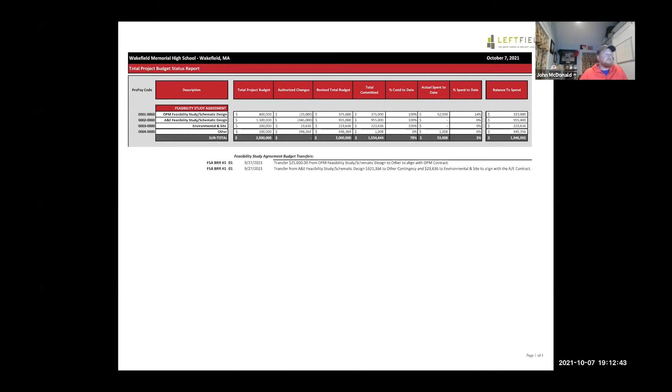Our feasibility budget. So MSBA has standard cost codes and cost categories. In the feasibility, there's just 4 of them. So this is sort of a standard budget template for MSBA. You got the OPM feasibility schematic design, the architect and engineers feasibility schematic design, environmental and site, which is a lot of the architect and their consultants' work. And then you've got another category, which is really just like a contingency for miscellaneous items. So the original budget was $2 million. It was approved by the town some time ago, I think maybe this time last year.

That we're working to, that's been submitted and approved by MSBA. It's in their ProPay system. ProPay is the system that MSBA uses to process invoices and reimburse school districts. So we're working with MSBA on that.

Last month, if you recall, we had a budget revision request. Anytime we change any of these approved amounts in the line items, we have to submit a budget revision request. We did that last month based on the actual OPM and designer contracts that have been processed and submitted to MSBA. So our revised total budget is in this column. We're still tracking that $2 million, but our other category is significantly more than what we started with. So that could be used for unforeseens or miscellaneous stuff as we move forward.

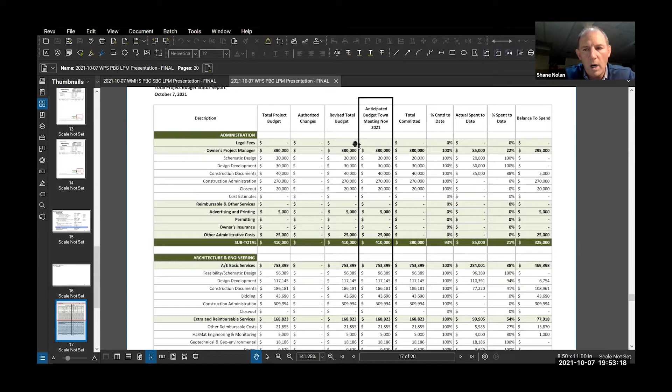I've added a column in here just to show what we anticipate the revised budget is going to be, and what we think we'll be going to town meeting with on November 6th. What I've done is I've plugged in Bond's last estimate number, which was 9.165, including a pre-construction fee. So that's what bumped it up. We talked a little bit about the overages and the reasons for that at previous meetings, but I've plugged that in. And then down under the construction contingency, we were carrying a 9% construction contingency originally.

I don't recommend that we continue to carry that dollar amount. I think it would be appropriate to prorate the 9% with the current construction estimate. So we increased that dollar amount for the construction contingency to about 840,000. Given what we've seen and what we know after walking the building numerous times, had design meetings, working group meetings, I think a 9% construction contingency is absolutely necessary for this project. So that will bump our overall project budget up to about 12.15 million.

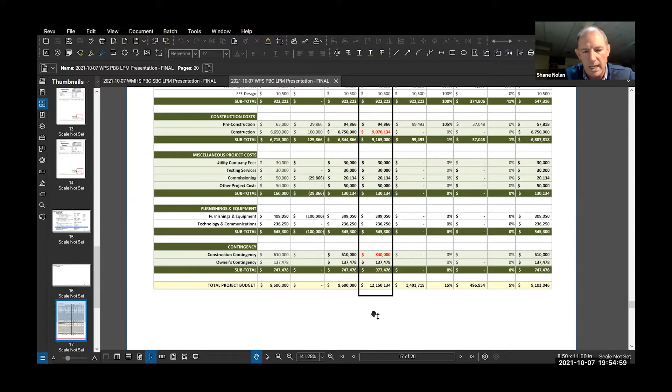That's what we expect. The number will be somewhere in and around that when we go to town meeting. We'll have the hard bids on November 4th. So hopefully that construction number will come down a little bit. But just wanted to sort of let people know what the overall number is right now, based on the latest cost estimates, that we're up around 12.15 million overall cost, which is about 2.5 million more that we'll be requesting at a town meeting.

What's the game plan to get ready for town meeting? Like, who's going to be presenting? What are we presenting? Do we have support from town council, school committee that are going to stand up? I feel we're going to be getting these numbers last minute, which we know, but are we prepared for the town meeting to ask for $2.5 million? What do you mean, are we prepared? We're going to be asking for it. We've talked to Steve. But how is it going to be presented, I guess? This message has to... I was hoping you'd do it, but I guess I have to. Well,

yeah, I mean, I requested information from Bond, and Lynn gave me some more information on how those costs have increased due to the pandemic. You know, where we were pre-pandemic and where we are as a result of the pandemic, and the costs that have gone up, some of them going up 30%. I have a whole page full of information regarding the costs that have escalated. And

Steve is going to indicate that essentially, because we're bonding this over a period of time, the extra 2.5 million is not a lot of money. I think he was saying like 75,000, 80,000, something like that a year. So we talked to Steve, we worked it all out. We haven't presented it obviously to town council or to the FinCom yet, because FinCom hasn't met. And when the FinCom meets, I'm going to give them essentially the 2.5 increase and hopefully indicate that it's going to be less than that once we get the bids in, but we won't get our bids in until the 3rd.

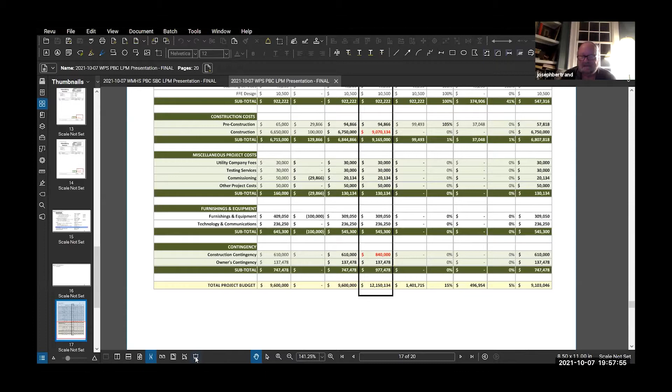Any other questions regarding this and a potential town meeting request? Good job to Janet and HKT for pushing that bid package up. I don't know how comfortable you feel with it, but I like it. It's good news. It's going to printer. We're nervous, but working hard to get it. We'll have an addenda. I've talked to Shane about a series of addenda, probably 2. All the consultants have been panicked this week, as they normally do, especially with the loss of 2 weeks. They're all scrambling. So we're hoping that we have a good package.

I think the architectural is in very good shape, but it's the coordination that is the thing that we worry about at this point in time, but we're working hard on it. We'll have the opportunity to reissue drawings as we find things, or Word documents or spec sections as we go. We're trying to pick up as much of it as we can this week. That's why I've been papering Shane to death with details of the front end, and we'll be doing our best. Thank you.

So next thing tonight: any other questions regarding the budget and the town meeting? Okay.

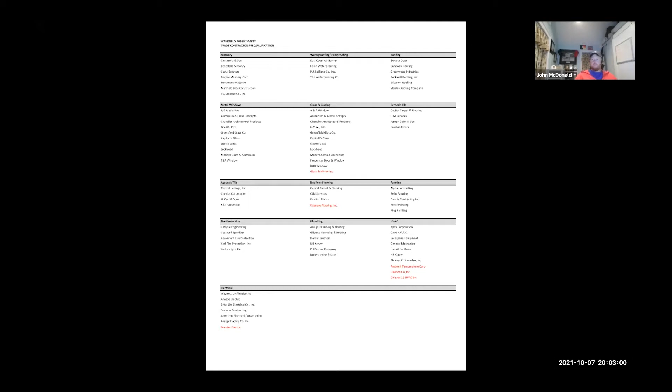Hearing none. Chip? Yes. John? Yes. Bill? Yes. Mark? Yes. Tim? Yes. Jason? Yes. Tom? Yes. And Janine? Yes. And I'd like to thank specifically Chip and Tom for handling this on behalf of the committee. Appreciate that, guys.

All right. And then just have a slide, I'll hand over to Dave to talk a little bit about the GMP, what that will include. We'll certainly have a draft for November 4th, and then we'll look for some sort of approval, whether it's the full GMP or an interim GMP sometime after town meeting. But I'll hand it over to Dave to talk about that.

So those of you that were involved with us at Galvin will sort of remember how our GMP is structured, but for those that don't remember or weren't involved, we can go through a real quick summary on what goes into the GMP. Obviously, the GMP is a contract amendment that switches our contract status from pre-construction and authorizes us to proceed with the construction. So the major thing that the GMP allows us to do is to start requesting approval for authorization to sign up subcontractors.

Obviously, we just went through the pre-qualification of filed subs. They'll all be hard bids in hand at that point, so that's really easy to establish those trades. And then for all the non-filed sub trades, we have them on the same bid schedule. But as you can probably imagine, with the way things are right now, 3 weeks is tight.

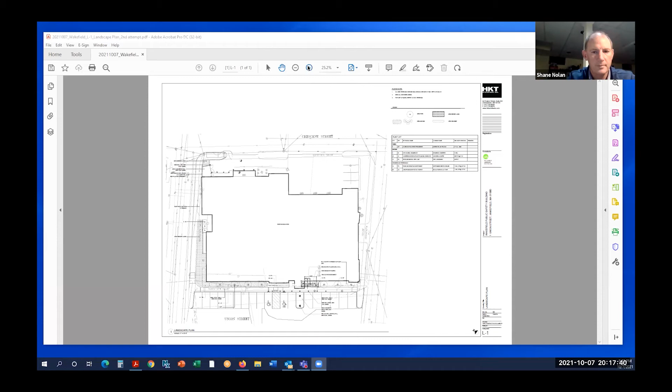I went over this a little bit with Shane last week when I was with the chief, and he saw it as well. So I just wanted to go over what we're left with when we add these additions on. There's an addition here, there's an addition here, and there's an addition in back there. So I wanted to go over the parking. There are currently 18 parking spaces, and at the end we are going to have 18 parking spaces. They've shifted, of course, as the entry has shifted. You have this extension that comes out now, and we have an extension.

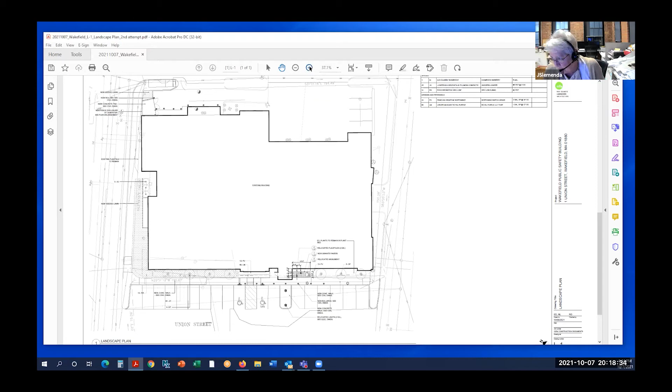It's a little bit smaller because the parking spaces are per code, and the van and the regular parking spaces are per code now. I don't know if they were before, it's not relevant. And then I'm going to blow this up a little bit more so you can see the actual entry. So you're going in here.

We are moving the flag poles, which we always had in the drawings, over to just to the right of the new glass box entry. We use those elements to give some elevation to that element to make it a little bit more pronounced. Our landscape architect pointed out to us that we had the flag poles too close to the building and the flag would whap against the building. So we shifted them a little bit so that isn't too annoying to anyone.

And then we've moved the monument over to that side as well. So that's what will happen outside the building. And then the other couple things, and maybe Dave can comment on this, the light poles. There's 4 of them in front of the building with the big light poles. They're not shown on this, somehow they got missed from this drawing, but there's these 2 here.

This one right here is actually sitting right in front of the building, so we're going to have to shift that. And the other 2, we plan on leaving where they are. They'll have to be, I believe, removed during construction because you just won't have the room to do the construction. Dave, is that a good comment about that? Absolutely. Yeah, they'll be removed and then reinstalled.

Reinstalled. And the question is whether that foundation, what's below grade, will come out as well, or whether we'll be able to salvage around that. We should probably talk about that because we need to do that. And we're going to be replacing all the sidewalk along here as well. So the question is, do we need to shift this one because it's sitting right by the building? And do we shift the second one so we get an even light pattern on the paving? So that is the question.

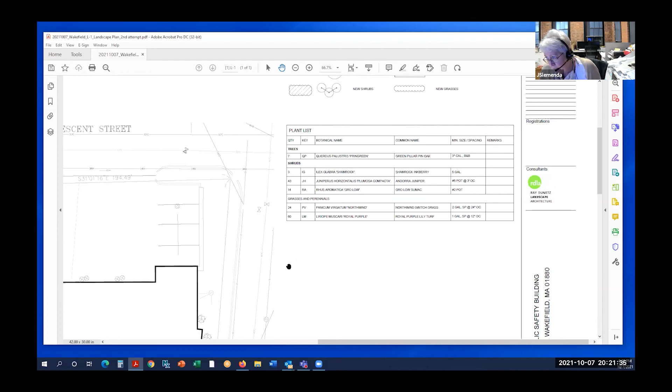And I don't have the name of those trees right in front of me, the listing of them. I can tell you from the schedule that they're green pillar pin oaks. And there are 7 of them planned for the site, and those are right in front of the building. If I can move the drawing, it would be nice. So those are the 7 trees, and we've moved them back closer to the building rather than out into the sidewalk.

So Shane asked me to show one other quick thing: we are relocating the lights. You have 2 lights now with a slightly smaller width of that element that comes out on the site. We sort of put them behind each other. I don't even know if they're needed, but if you've all walked into that building a million times, there are 2 light poles in the front and the flag poles are behind them. And so we're really changing the whole image of that.

And so their question to me is, do I even want to relocate them at all? I don't know how much they offer as far as light. They're not down lights, they're little posted globes. So we can talk about whether it is something you want to do or just leave one of them even. They sort of line up with the front of the building now. So that's what it looks like. The back of the building has the dumpster location, and this is the final layout of that.

A bunch of bollards now. As you know, we're more protective of public safety buildings now with bollards than we used to be because of 9/11. So we tend to have bollards in front of anything that's approachable by a vehicle. So there's a bunch of bollards. Does anybody have any questions about that?

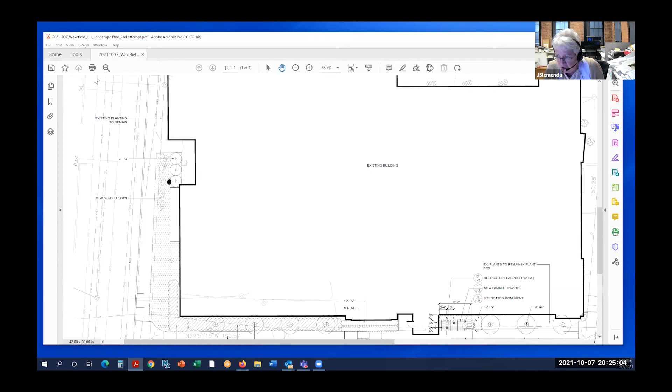Which one, these? On the left side. Crescent Street entrance. These 4 here? No, up. Up here. Oh, those are shrubs. Those are just shrubs. Yeah. And there's nothing up there. At the end, I think there's a little bit of lawn right there. And this is all paving, as it is now. Could that lawn be the electric car space? Well, there's a parking space in front of this.

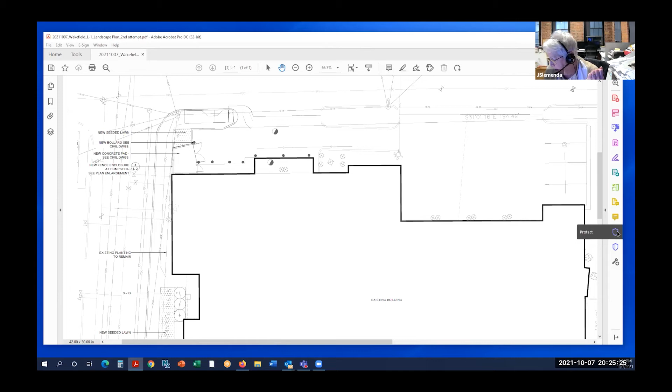I know it's a tight lot for landscaping. I can't draw it without... that's not a good way of describing it, but there is a parking space right there. With the addition, we had to push it back. This was the scheme that people approved, so to speak. So there are very few opportunities for anything here. And we can talk about it more. Should we leave them in for the bid right now? Yes. We'll establish a landscape bid price, but we won't pull the trigger on landscape for a long time. Okay. I think that's a good idea.

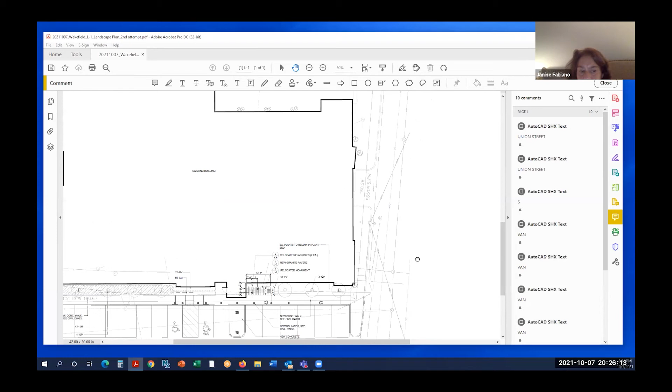What kind of trees did you say you currently had designed? They did the green pillar pin oak. Pin oaks. Because for the sidewalk trees, they often use a narrower tree. Something like that might work better. Which one? I'm not sure what kind it is. I had to find out. I call them little columnar, little leaf lindens. Yeah, very slender. This is what she came up with, but I'll ask her again if she has any other ideas because of the height and the canopy eventually. Okay. So that was that.

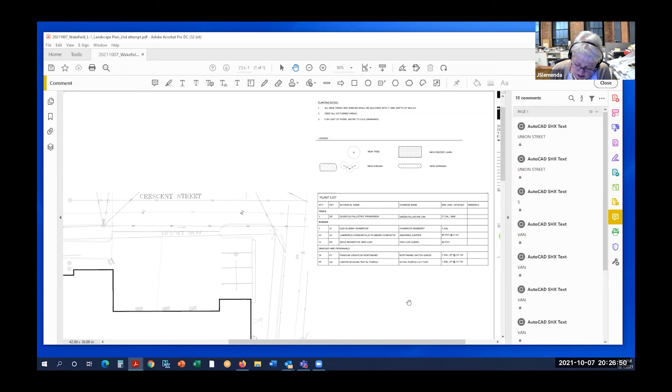So just the bollards also, John, I don't know if the police department has seen those, if they're okay with those. I know they protect the building, but I reversed my car into a tree in front of that building before. We've been putting them in; if our grade is raised, we don't have to do them as much, but this is right on grade. You could plow right into the front of the building if you wanted. I don't think it's a bad idea. Can I comment on the bollards? When we get to it later on, is this something we ask Joe to have Dennis be involved in, thinking about this?

Well, yeah, I mean, I think Joe won't want them, right? Because they get in the way of his snow blowers or whatever he uses to clear the sidewalks. That's why I want to ask the police first.

Yeah, Chief Scory? So my comment on the bollards is I like them because the areas that they protect are mostly glass. So when you're looking where the two handicap spaces are, that is the old entrance to the building. That's going to be all glass to the records office there. There is masonry, but there's a lot of glass there. And then we have the new entrance, and to the right of the new entrance is glass for the fire department administrative offices.

So I agree with the bollards. I think it's a great idea, especially out back. I just wanted to comment also on the trees out front. I like trees, big fan of trees, but we have a very limited amount of space there between the sidewalk and the building. And so if we plant trees there, they'll be growing against the building. We'll have branches hitting windows, blocking the views of windows.

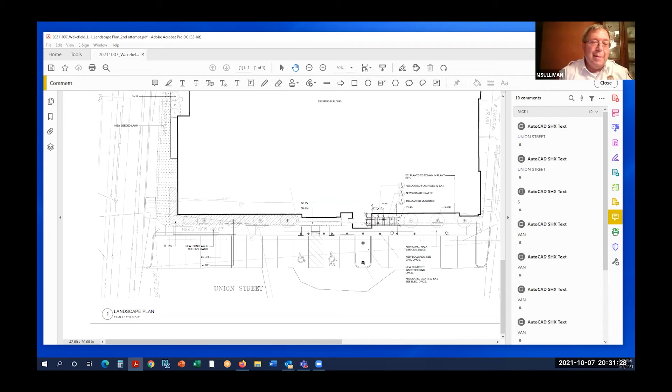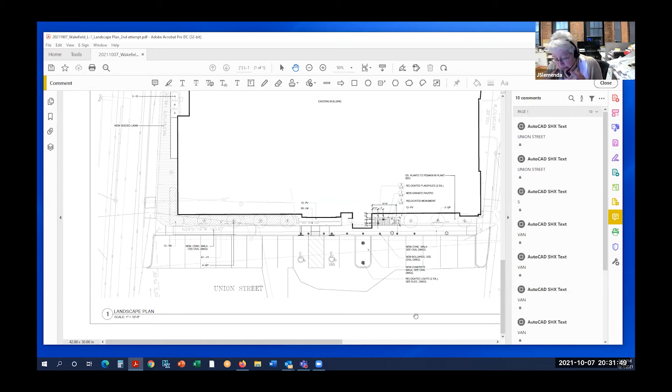All right, so I'll go back to the landscape architect. I asked her specifically to put something on because we didn't want to neuter the place by taking all the trees out without acknowledging that we could shift the locations and try to find something narrow. We'll get back to you on that one as we go. We'll own these for right now, and it should be okay. So that's the plan. Any other questions before I get rid of that? It's a tight site. So, okay, that's that. Anything else, Shane?

No, I forgot to follow up with you today, John. I spoke to Chip yesterday about the zoning. Did you hear anything back from them? Do we have a date? About the what? The zoning? No, we haven't heard anything. And I completely forgot about it. We've been so consumed with other things that got submitted. Chip, do you have any comments?

Well, so, yeah, I would have loved to have seen the package before it went in. But I told you months ago that we had Brian McGrail, a local lawyer that does all our public buildings pro bono. So I just want something sent to him, but we don't have to worry about that for the next 2 or 3 days.

Okay, okay. I mean, it sounds like it's going to be a pretty easy non-conform. It's already a non-conforming building. It's probably going to be a continuation of a non-conformity that is not more detrimental to the neighborhood. So it should be pretty simple. But I would have him present it. Okay.

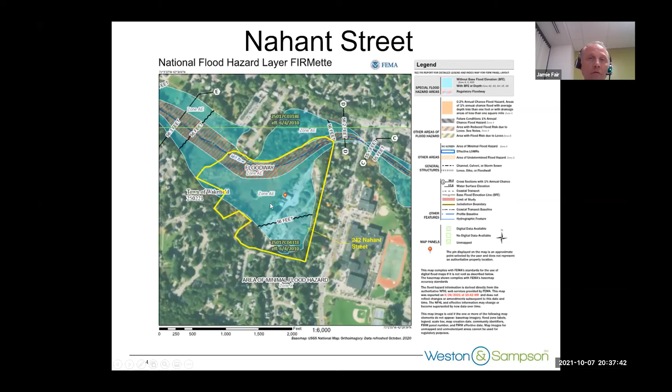You can see pretty much the whole site here is in that FEMA flood zone. So we had some concerns related to that. And we just summarized our initial findings on this. But as I mentioned, we're in the FEMA flood zone. We are adjacent to wetlands and the river. We also have residents abutting the property on one side, on the east side of the property. If we were to continue looking at this, we certainly would need to do a flood study to take a closer look at the flood zone issues.

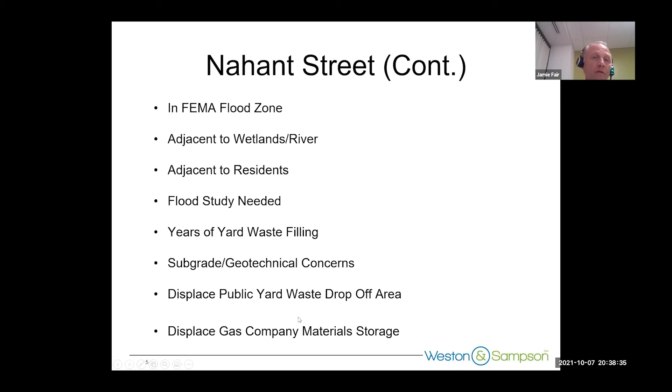We understand that there's been yard waste filling going on there for years now. And so there's definitely some concerns related to subgrade and the geotechnical concerns with foundation construction due to the filling activities. It is an active public yard waste drop off, so that'd be a function that would need to be displaced. And then we also understand that the gas company has a material storage facility there. So some of the challenges that we saw coming out of the gates with the Nahant Street site.

From our last meeting, we had mentioned before, we looked at these other sites, worked with Joe on these. We looked at the Vinton Street ball fields and the Nacella playground. And both of these are active ball fields, and turns out they're also in a flood zone as well. So we didn't consider those further for review.

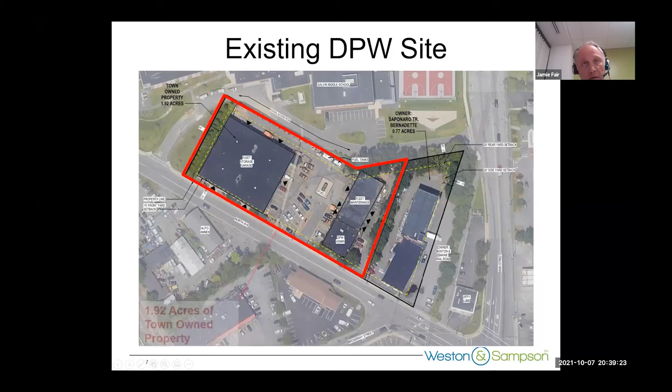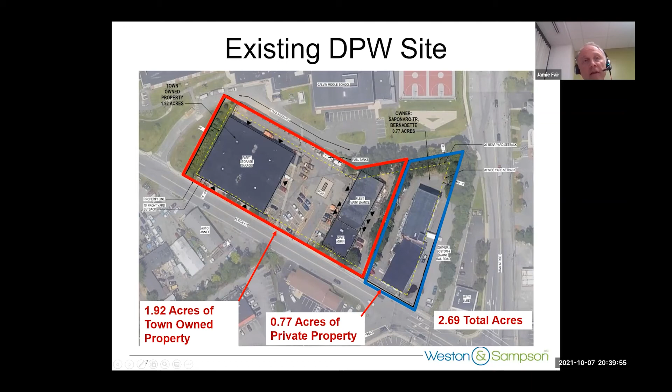So with that site analysis, that really brings us back to the existing DPW site. You can see the aerial here located right off North Avenue at the corner of Main Street. And at this site, we have a town-owned parcel of about 1.92 acres. This is all owned by the town, as I'm sure you know. And then we also looked at incorporating this adjacent parcel that's currently privately owned, because this site is small and we have this immediate adjacent parcel. That's another 0.77 acres. So with that parcel, we get up to just about 2.7 acres to work with. And so that's what we looked at for our various test fits and layouts, and I'll walk through those now.

So Jamie, let me just ask the question. Sure. I mean, you're talking about a building. Are you talking about eminent domain? Are you talking about buying that? What are we talking about if you're planning on using that 0.77 acres of the Kiltron building? Right. So I guess maybe Joe, I might ask you to chime in here. We just had some preliminary discussions. I'm not sure of the exact mechanism of how that would be attained, but I know that's something that we wanted to take a look at there.

So Chip, to answer that, it's something that potentially could start as a conversation. I think that if we weren't to think about that, it would take the constraints of the site that exists now and make it infinitely harder for Weston and Sampson to try to figure out a way to make our existing footprint work. That being said, absolutely nothing is written in stone. So if that is probably an option that the committee or the town would not want to think about, or at least try to have a conversation about, then we'd have to readjust and plan for it. But I think that the challenge with where we are and how we're laid out is circulation, vehicle traffic and getting in and out to do business.

And the more that Weston and Sampson went back to looking at, Jamie's group probably went through, honestly, between 14 and 16 different layouts to try to figure out how to get all the puzzle pieces to fit. How do we get 70% of the puzzle pieces to fit? And the keystone to that whole piece and keeping our operation there and making sure that we could operate safely and efficiently, that adjacent parcel is probably going to have to be something that we're going to have to think about our options there, and whether or not we want to have the conversation to see whether that is actually palatable and attainable.

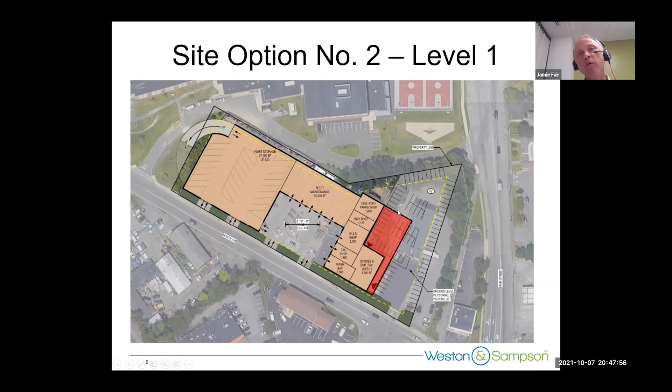Right, right. So we'll keep moving forward here and we'll get into some of those details a little bit later. But this red area here, this is an area where the offices and employee facilities would extend out over the parking to get the square footage needed for the program and co-locate that with the parking. And so this second level here would be offices and employee facilities, level 2.

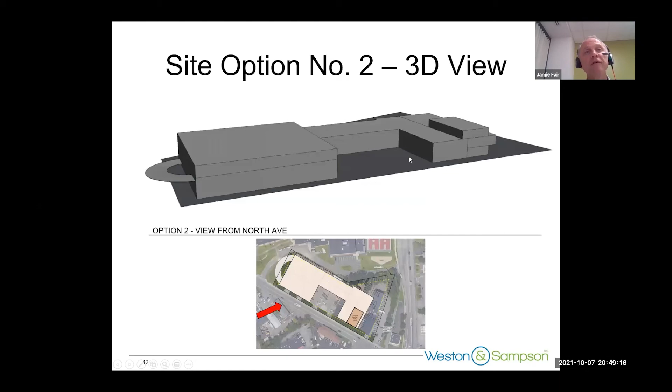And this is another massing diagram looking from North Avenue, where you can see the 2-level vehicle storage here on the left with the ramp going up, vehicle maintenance in that open courtyard that we talked about here. And then again, the 3-story admin and employee facilities.

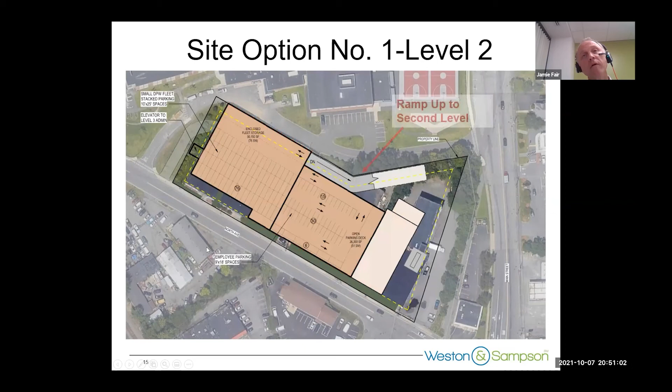And then we'd have this ramp that would run up to the 2nd level along the back side of the property. And then this red area, this would all be a 2nd level here. And I'll walk through this a little bit more. So that's the ramp that gets us up there. And then this tan here is that 2nd level, where this would be an open deck. It'd be a canopy, but an open deck for employee parking, to get it up over that courtyard to fit all of the employee parking that we would need for the full program.

And then on this left side, this would be an enclosed second level, minimally heated, for the balance of the DPW trucks and equipment. This is all stack parking. We recognize this is not preferred from an operational standpoint, but just as a test fit, what does it look like if we got it all here? This is a way to make it work, and it could be improved if we want to go in this direction, but we'll start here.

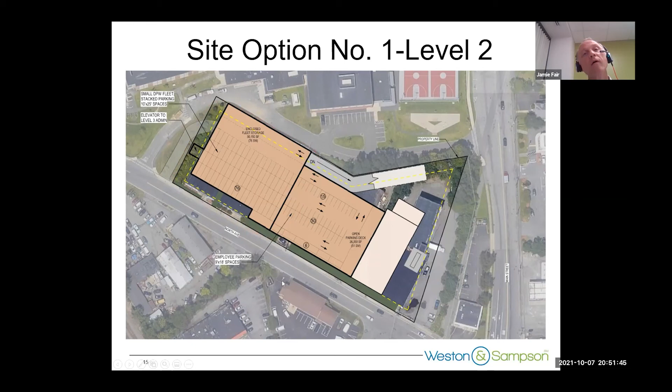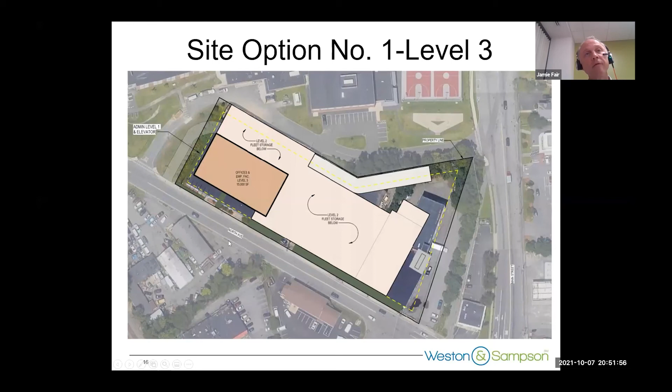And then we have level 3 over on this side with the employee facilities and offices on that third level there. And so another massing diagram from Main Street: we have the ramp that comes up the back here. And then this is that deck that spans over the open courtyard for employee parking. And then we have the 3-level structure on the right, vehicle storage and admin. And then we have vehicle maintenance over here on the left.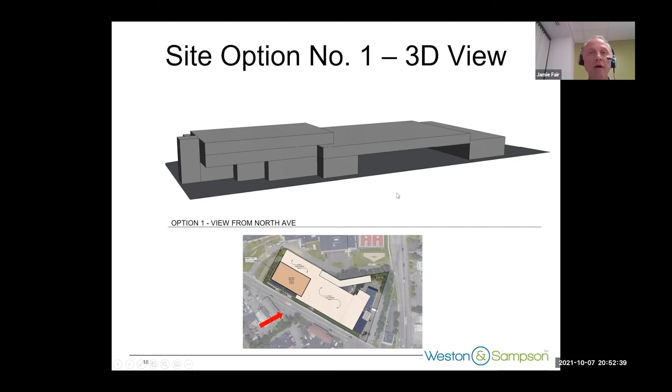So definitely outside the box, we recognize that. It's actually a smaller structure and it fits more, but that's because we have that significant stacked parking arrangement. And that structure, we're separating out the parking deck, which is another about 26,000 square feet, because that's really more of a site feature. It's not like heated enclosed space. So this would fit the entire program.

And we'll talk about costs in a moment, but I just want to go through some of the other options that we looked at just to give you a sense of some other possibilities, but we didn't really fully carry forward due to some shortcomings. So this option 3, this is level 1. With this courtyard, really we feel is too tight at 65 feet with facing overhead doors here. Not good from a truck circulation standpoint. Fleet maintenance would be undersized from what is really required at this point, and the wash bay would be exiting into the vehicle storage garage.

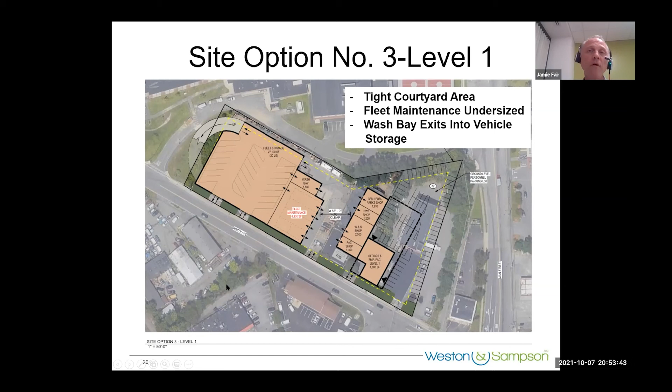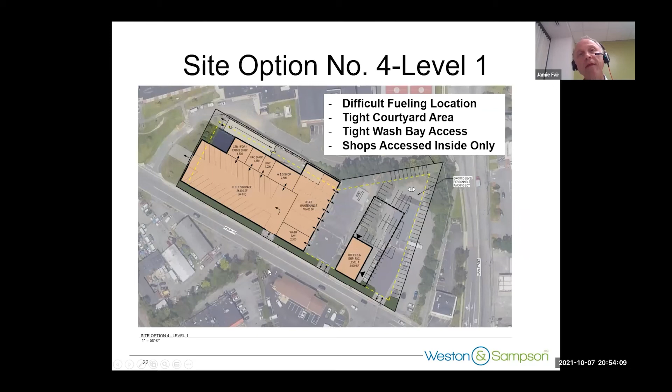So we looked at this layout, didn't really like it, but just wanted to share it with you so you kind of understand the process we went through. And this would be a 2-level structure. Option 4, similar thing. Didn't really love it from a functionality standpoint, but we did look at this type of configuration, and the fueling was really in a difficult spot and a lot of other operational concerns. So we didn't carry that forward either. And this would also be a 2-level structure.

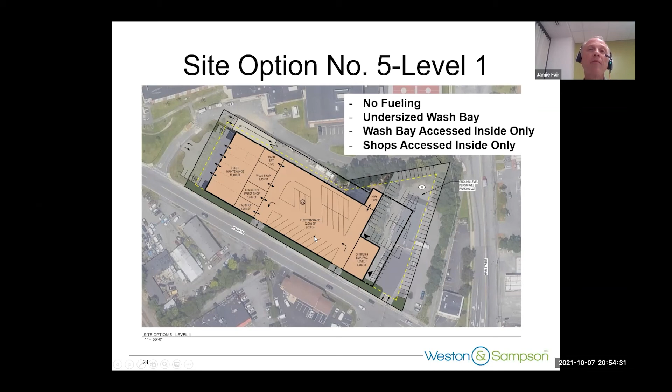And then this 5th option, this fits quite a bit of the program from a parking standpoint, but the wash bay would be undersized. We can only access the shops in the wash bay from inside, and we weren't able to fit the fueling on the property with this layout. So we didn't carry that forward too far either. But just to give you a sense, like Joe said, we've looked at a lot of different options to try to get this to work.

So I know these are big numbers, and we'll talk about historical costs and kind of how we got here. But construction 2021, we're about 49.6 million. And this is based on a high-level concept cost from our independent cost estimator. He's done a number of these DPW facilities, has a good feel for these buildings and the construction market. We're escalating that out 2 years at 5%. So that's getting us out to 2023 construction. We're in the 54 million range there.

And then we have the A&E permitting, environmental. There are some significant environmental concerns here. There was a meeting package that has more detail to these numbers. You may not have had a chance to look at it yet, but we can provide that also if you haven't seen it. But we're carrying an $800,000 allowance for environmental remediation. That's really an educated guess at this point, to be further assessed. Still a lot of unknowns.

Looking at ground improvement programs with the presence of a peat layer that's buried, similar to probably what you've seen at the adjacent Galvin School. Owner contingency, in case there's additional site concerns, testing that's needed related to environmental, and then construction contingency. So again, I know this is a big number, but that's what we're coming up with now, coming out of the gates. And this is the larger of the two for the full program.

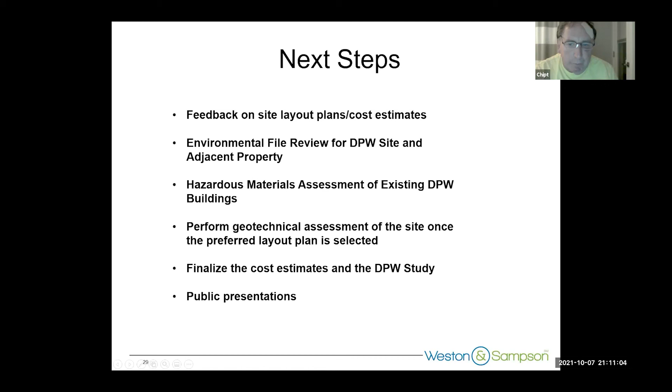Unfortunately, I think you need to clean that up first, and then we can go through them and just approve what needs to be approved. Okay. We're going to be meeting in 2 weeks, Joe. No, 3 weeks, the 28th. We're going to be meeting the 28th. Let's find out which ones need to be approved and which don't, and we can do it then. Is that all right? It's fine with me.

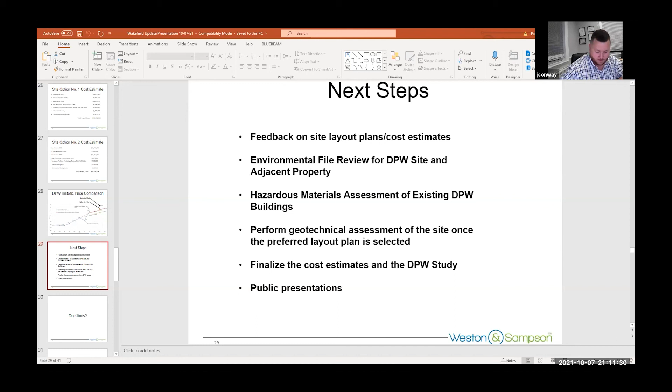And at that time, Joe, maybe you can reach out to Steve and have a more serious conversation on whether Crichton's a real option or not. Yeah, I'll defer to Jamie on this one too, but I think we could probably work out the existing site plus maybe look into 108 a little. I can have my group figure out, and I think we're in zone B, what that would mean for putting an administrative building on the other piece of property that we actually own. The one right across the street.

Is there enough land on Crystal, where you park the water trucks now, to do anything? We had looked at a water department building there at one point way back with Rick. I don't know if you were part of that. No, that was before my tenure. The only question I have, and it's not my area of expertise, but we got a heck of a lot of pushback for trying to do a pickleball court next to Lake Quannapowitt.

So I can imagine trying to put a building and some of the things we do next to a public water supply will be even stricter. Yeah, I mean, we did have an approval for that at one point. Right, and maybe that just was a bad number. Right. We could certainly vet that out. Or maybe that becomes employee parking, right? It's directly across the street. This whole process has been a lot of what-ifs and paring backwards. It's just the next step in the conversation.